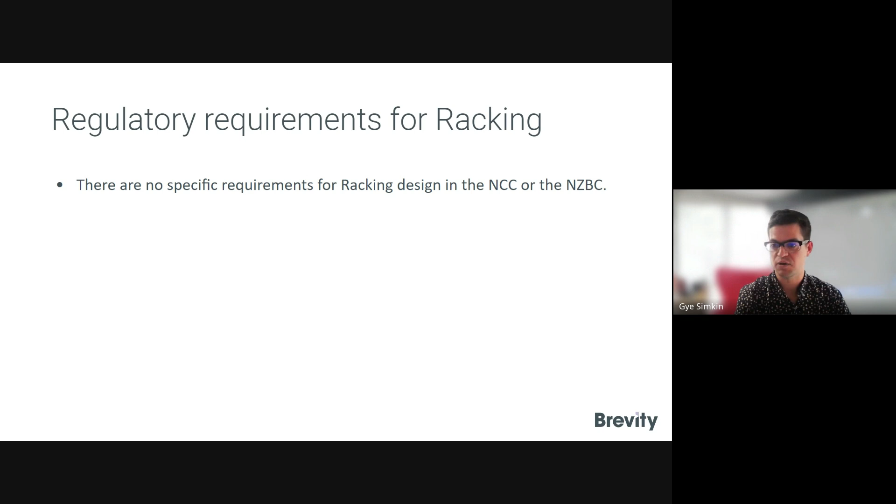Well, let's kick off at the start here. So talk about the regulatory requirements for racking. And this is very similar for Australia and New Zealand, where there are actually no specific requirements in the New Zealand Building Code or the Australian National Construction Code for racking design, which some of you may find quite surprising when you take it back to the high regulatory level.

However, the larger storage racking structures are generally regulated at council level through the regulatory frameworks they have. And it is often requested that structures obtain a PS1 engineering certification, or if it's in Australia, you've got your Form 15s in Queensland and the Reg 126 certificates in Victoria.

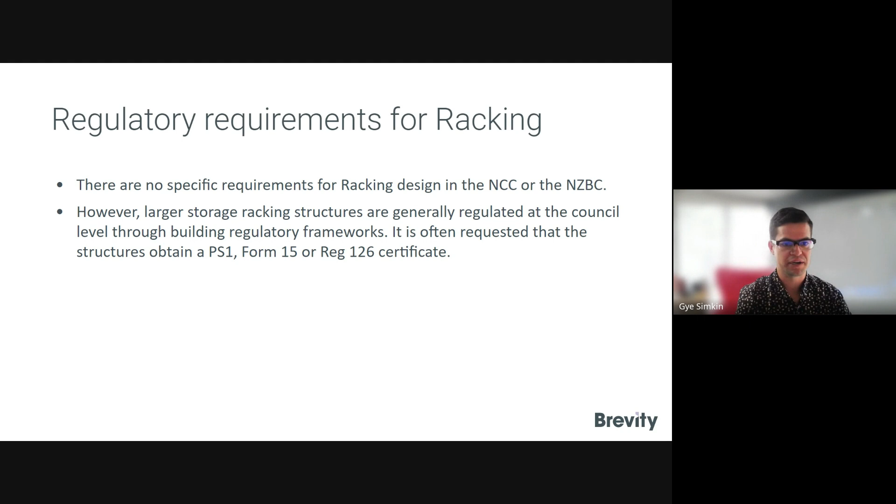There's the deemed to satisfy verification method for racking, where racking can be designed to the AS/NZS 1170, which is the structural actions used for engineering design of basically any engineered system structure, and also to the AS/NZS 4600 standard for cold formed steel structures. And then there is this additional standard, the Australian AS 4084 for steel storage racking.

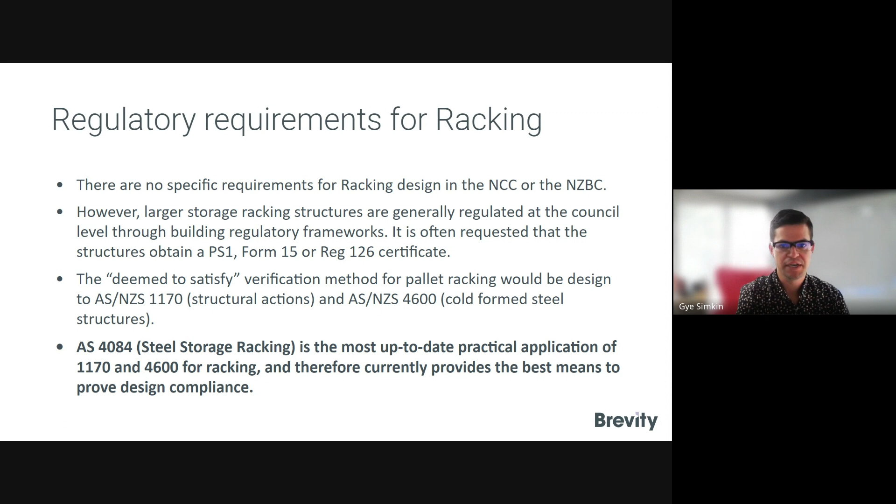And that is the most up-to-date and practical industry-best application of both the 1170 and 4600 for racking. And we definitely see as engineers that this currently provides the best means to prove design compliance for racking structures. So let's jump into that AS 4084 a bit here.

So about 11 years ago was the 2012 version of the standard. And that really did govern the steel storage racking systems. And as a point there, it was a single document. However, in the last 11 years, there have been advancements in the industry, and the ever-evolving need for safety and efficiency has led to the introduction of a newer standard.

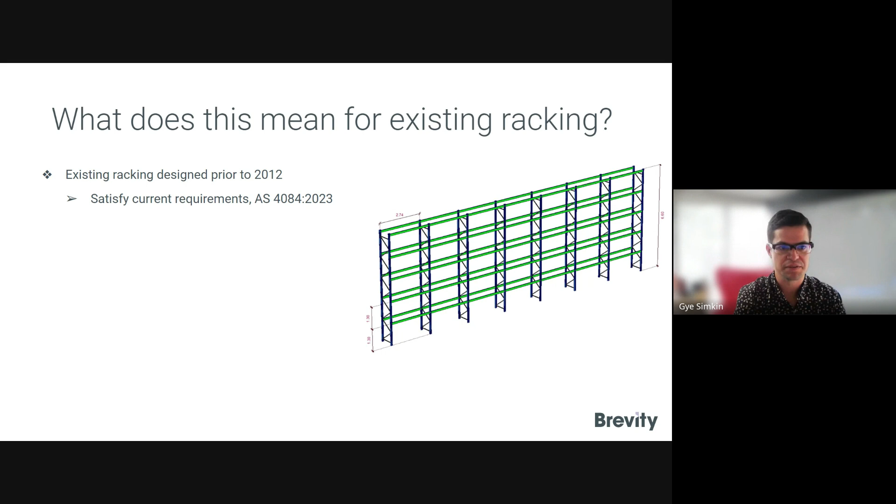And what does this mean for existing racking, you might be thinking? So existing racking that was designed prior to 2012, the original version, should actually satisfy the current requirements of the latest standard 2023. When we have existing racking that was designed in the last 11 years, well, no action is required there from a regulatory level.

And the third option we've added to this slide is for existing racking that has undergone some form of substitution. Maybe it's an alternative product, the beam or column or base plate's been updated, or if the geometry has been modified, another level's been added, or surprisingly, if the actual racking structure has been moved from one site to another. Well, going from this, that racking should actually satisfy the current 2023 requirements.

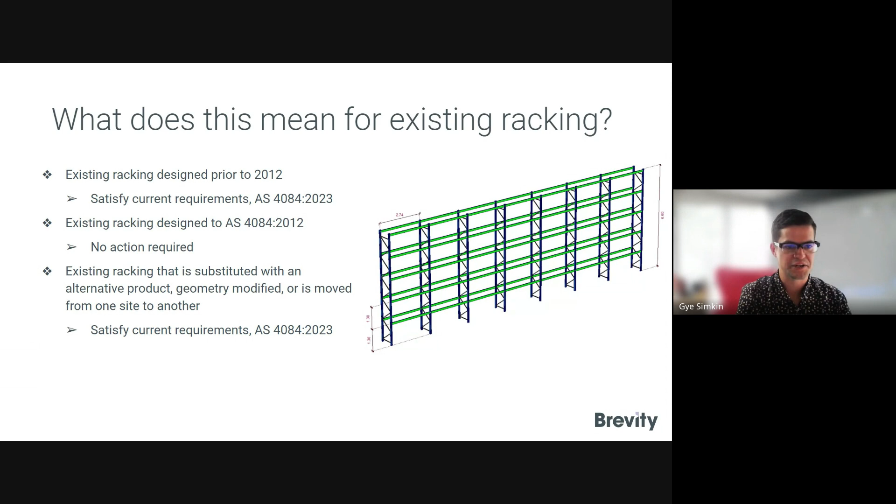The new standard has resulted in changes to various design parameters. Let's discuss some of the key ones here. The first one is ductility. In the absence of any test data, the racking now can be designed for ductility of 1.5, which previously was 1 or 1.25 for both cross-aisle and down-aisle directions. But the ductility factor may be increased by undertaking special studies in accordance with the cold-formed code 4600.

And the other part is the structural performance factor. We used to use that performance factor from 1170.5, where the value could be less than 1, but now the new standard requires you to use 1 for the Sp factor. We cannot use less than 1 anymore.

And the other main change is when calculating the seismic mass for calculating the seismic coefficient. There is an updated formula on that, and the main one is the rigid mass factor, which previously we were using 0.67, which was the best practice from the brand's guideline, but now there is a range of 0.7 to 1, and that depends on the product that is going to be stored on the rack.

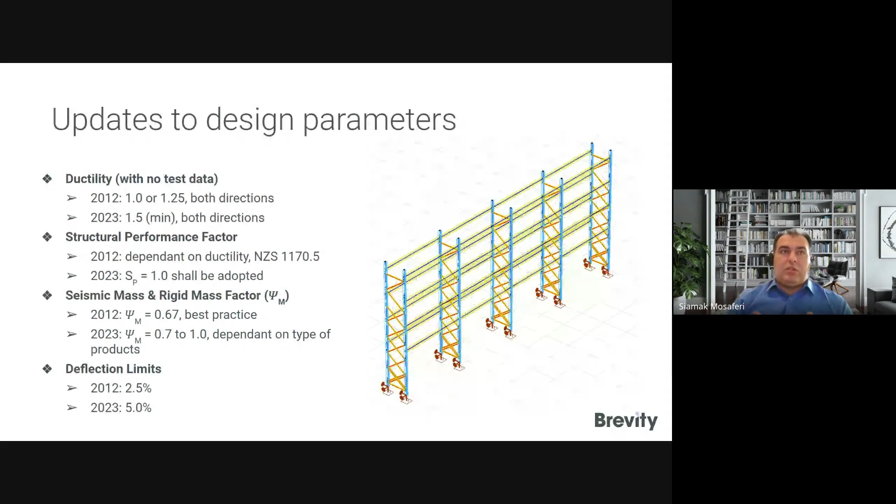And the next slide is just as a reminder, because this is one of the things we see on site and they request from us a lot. This was covered even in the older version of the code: a minimum of 2 anchors per base plate shall be used for industrial types of rack. When we say industrial, it means when a forklift or any mechanical equipment is used to store the pallets.

And also the design action in the floor fixing shall be calculated for the worst case action combination at the ultimate limit state. And that should be about 5 kilonewton in tension and 8 kilonewton in shear separately. This is just to make sure they maintain the stability against overturning. And we need to be reminded that the supporting concrete slab shall have sufficient strength to withstand the design forces like uplift, punching shear, and soil bearing.

And another reminder is that for hand-loaded shelving under 3 meters, we might use 1 anchor, and that depends on how much load we are going to store on the rack.

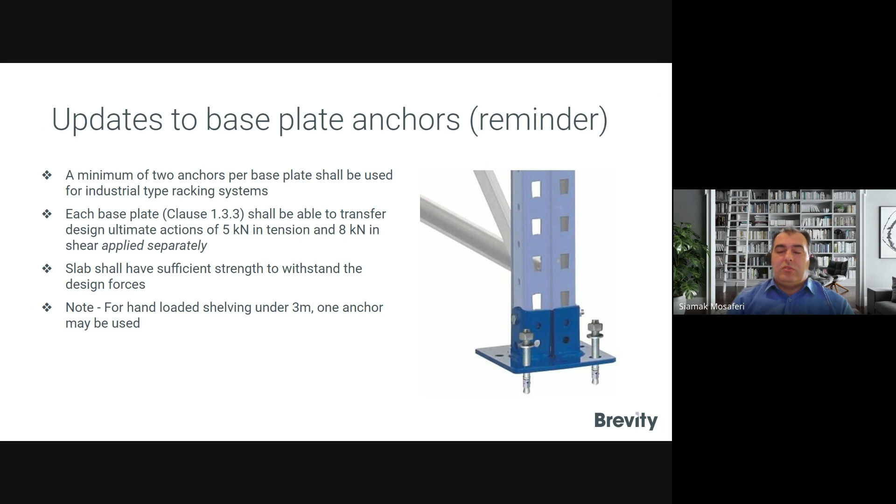There's another two quick things to cover in this presentation. So safe working load signage, the SWLs. This is something that they've really reinforced in the 2023 version, that the signage shall at all times reflect the current configurations. So I'm sure this is something that the racking suppliers listening in today are well aware of. And the signage shall be updated following any modifications.

And this includes changes to the weight or size of the goods, to any racking specifications, also the type of goods. If it's been designed for, for example, liquid, it should say that. And there's also changing the method of handling. So if it's a smaller hand method versus the mechanical forklift, the signage does encapsulate that information now. There's also an interesting point there that a competent person shall be consulted prior to modifications.

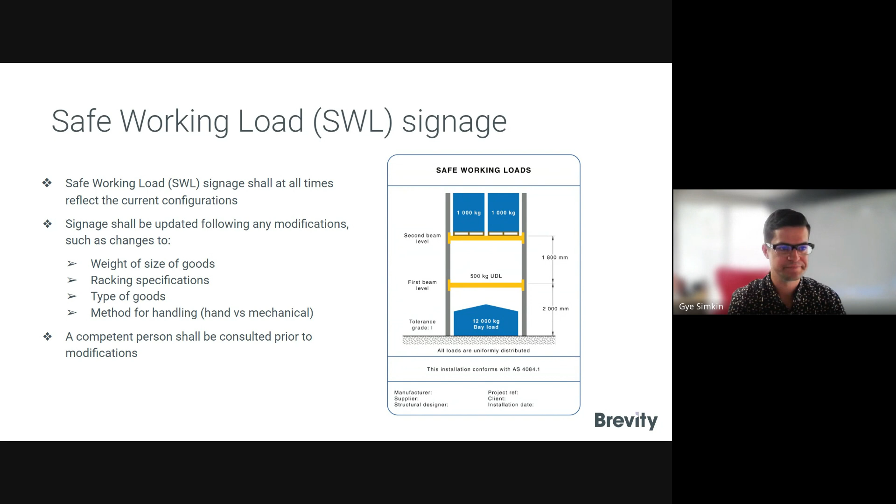And the last point we want to discuss for this webinar is around the requirements for annual audits. And this falls into part 2 of that new standard. So inspections to racking are required every 12 months. And this is predominantly to cover the maintenance and pick up any safety factors of that racking. And it's quite descriptive in there for all the things to look out for, including damage reporting.

And so the 2023 version is the same as that. There's nothing that's been taken away. There's only points that have been added. And the main two that jumped out to us were that the annual audit shall be completed by a competent person and also from an external provider. So we've had a few clients contact us regarding that last point there.

And that's actually it now. We're going to jump into some key takeaways before the Q&A session. So the latest version of AS 4084 does include changes that racking suppliers, designers, and engineers need to be aware of. We spoke about how this affects existing racking. So we covered that existing racking prior to 2012 needs to meet the current 2023 requirements. Existing racking designed in the last 11 years, no regulatory changes are required unless modifications are to be made, which is covered in this third point. Any substitutions, modifications, or moving from one site to another shall meet the latest 2023 standard.